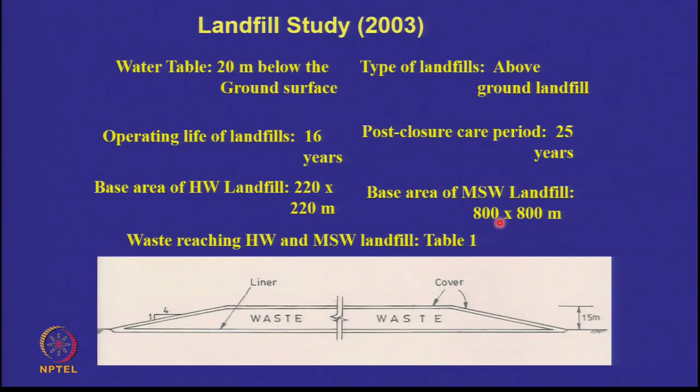First, I'd like to look at a landfill study, for the year 2003. It is for an above ground landfill. Water table was 20 meters below the ground surface. Operating life was 16 years. Post closure care period was 25 years. Two types of waste: hazardous waste and municipal solid waste. The hazardous waste landfill is 220 meters by 220 meters, square. And municipal solid waste landfill is 800 meters by 800 meters.

So first, let's look at the municipal solid waste landfill. 1000 tons per day of waste coming in. Total height of the landfill was 15 meters, out of which the liner plus cover would take 2.7 meters, and the balance 12.3 would be taken by the waste and daily cover. As a thumb rule, your daily cover may be 10% of the waste.

So remember that the total height of the landfill is 15 meters, 2.7 has gone into the liner and cover. That's why people keep wanting to make the liners and cover thinner and thinner. If you put a geosynthetic clay liner instead of clay, you will save a meter or 90 centimeters. If you put a geocomposite drain instead of sand, you will get 30 centimeters more. So everybody wants to make this thinner and thinner.

But we are going to look at this case, and if 700 tons per day comes in onto the same area, the height is about 11 meters, and if 1300 comes in, it's about 20 meters. Here the base area is 800 meters by 800 meters, whereas for the hazardous waste case the base area is 220 meters by 220 meters. Please note, this is TPA and this is TPD.

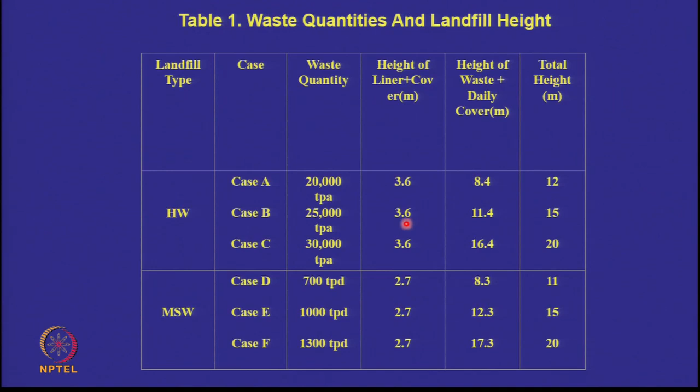The amount of hazardous waste which comes out is normally much smaller than the amount of municipal solid waste which comes out in any urban area. So here we are talking of a hazardous waste landfill. The height of liner and cover has gone up from 2.7 meters to 3.6 meters. You can go back and look at the components. Here the base case is 25,000 tons per annum. 15 meters will be the total height, 11.4 meters for the waste and daily cover, and 3.6 for the liner and cover. We are going to look at liner costs, cover costs, landfill costs, and the influence of the height of the landfill.

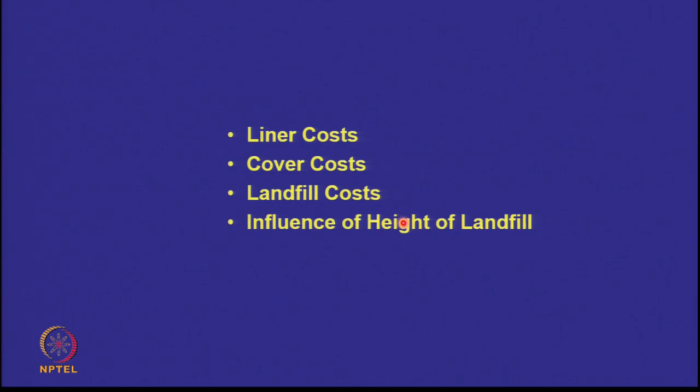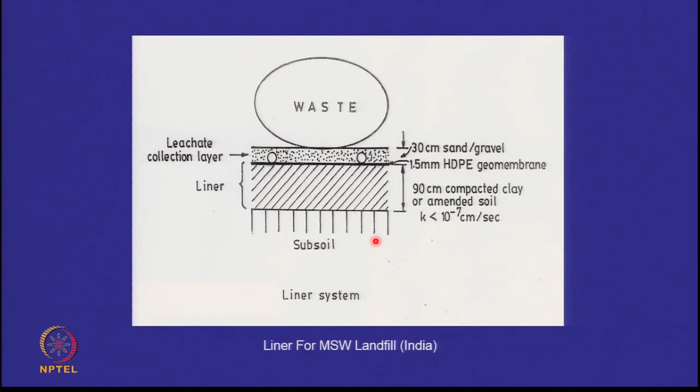Let's just recall, this is our liner for a municipal solid waste landfill. Thickness is 0.3 plus 0.9, 1.2 plus other elements. If you look at it very closely, it has many more components: a separator filter, the leachate collection layer, a protector, the geomembrane, the clay, and another separator filter. So many layers.

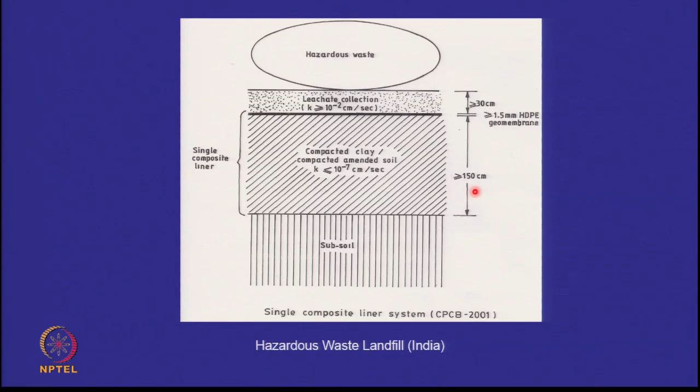If I look at the hazardous waste landfill, this becomes even thicker. This is 1.8, 0.3 here, 1.5, 1.8 meters just at the bottom. If it's a double composite liner, there are even more elements.

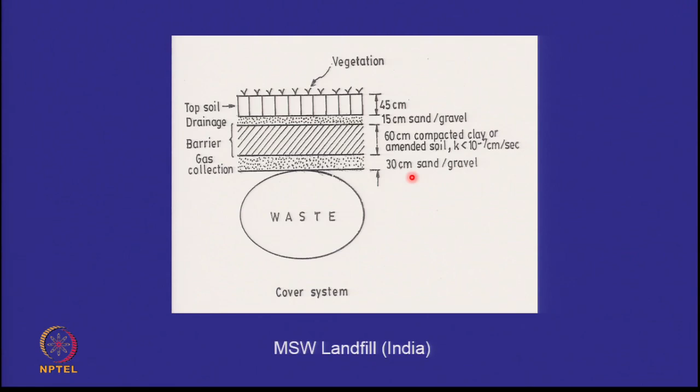Similarly, if you look at the cover, in the municipal solid waste landfill, 45 cm, 0.45 and 0.15 and 0.6 and 0.3. So this whole total becomes 1.5 meters, right? 1.5 at the top, 1.2 at the bottom makes it 2.7 meters, which you saw in the table that I had shown you.

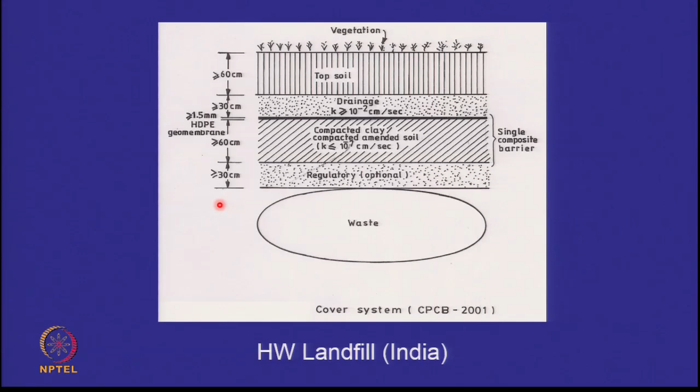If you have a hazardous waste landfill, 0.6 and 0.3, 0.9, 0.6 and 0.3, 0.9, that becomes 1.8 meters at the top for the cover. So out of the 15 meters, 1.8 meters is being taken by the cover, and similarly 1.8 meters is being taken by the single composite liner.

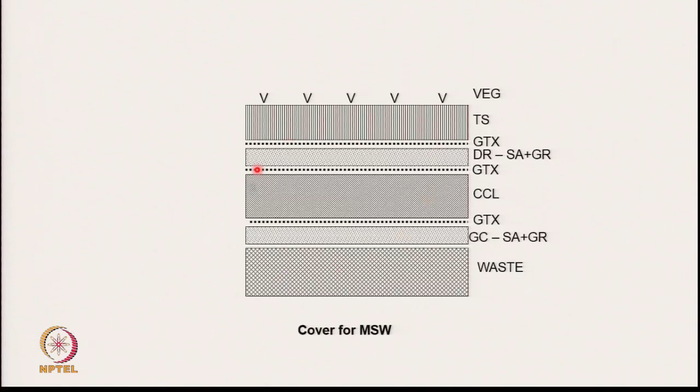Again, in the cover you have many interfaces, and if you are trying to recover methane gas as well, then you have to put a geomembrane. So this becomes the cover for both municipal solid waste landfill and hazardous waste landfill. But remember, in the municipal solid waste landfill, the thickness of the elements is different from the hazardous waste landfill.

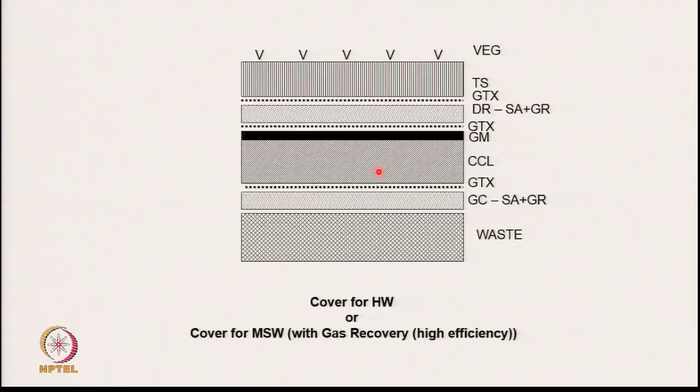So to estimate the cost, you need to know the cost of materials. In 2003, when this exercise was done, the cost of placing, spreading and compacting the waste was rupees 50 per cubic meter. It's like a huge earthwork problem. You understand this? For earthworks, if you want to make an embankment, how do you pay the contractor? Say you have to construct a road embankment from here to Meerut, 5 meters high. How will you work out the cost of the project? Fundamentally, it will be the cost of earthwork.

You will find out the volume of the earth, multiply it by the unit rate at which the earth is available, at which it can be transported, at which it can be placed with compaction. You multiply and you get a value.

Same thing here. Once the waste arrives at the site, you place it, spread it and compact it, and the cost is 50 rupees per cubic meter. If you have local soil which you are going to use as topsoil, the rate is 120. This is 2003, please note, how many years ago?

14 years ago, so these were the rates at that time. Medium fine Yamuna sand 200 rupees per cubic meter, Badarpur sand 400 rupees per cubic meter (this is coarse sand), gravel 550 rupees per cubic meter, clay from 200 kilometers 600 rupees per cubic meter, amended soil, Delhi silt plus 5% bentonite, 250 rupees per cubic meter.

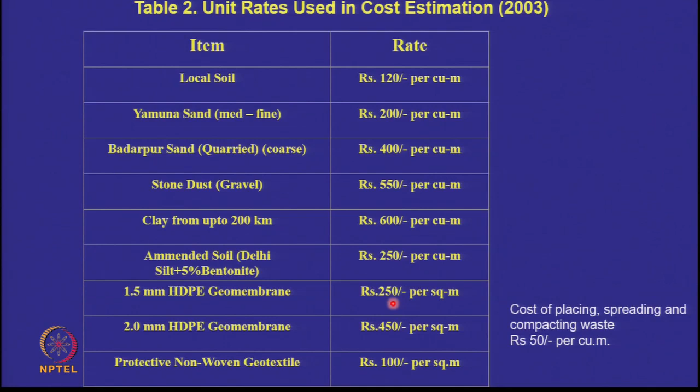So I am giving you an idea of what they cost in 2003. I will also give you the values today.

Just before coming to this class, instead of looking at a CPWD manual because they may not have everything regarding geomembranes and geotextiles and their unit rate, I rang up a civil contractor friend of mine and said, look, I am going to give this lecture today, I need the latest rates on this, and I will look at it a little later. But let's see what this study threw up.

Now, if you want to do the costing of a liner system, you know the thickness, you know the areas, you work out the volume of material required.

So if I look at the liner system, I would have a leachate collection layer, a geomembrane, a compacted clay layer, then a filter between the waste and the leachate collection layer, a protector between the leachate collection layer and the geomembrane, and some pipes, sumps and pumps.

So these are the quantities multiplied by the unit rates for the municipal solid waste landfill, and these are the quantities multiplied by the unit rates for the hazardous waste landfill.

This is 800 by 800 meters square. The amount of waste coming in is much larger. This is 220 into 220 meters square.

So you get some figure at the end which you can convert into the cost per square meter, just like we have the cost of construction per square foot. The figure which comes out for a liner system here in 2003, when the landfill height was 15 meters, was 800 rupees per square meter for municipal solid waste and 990 rupees for hazardous waste.

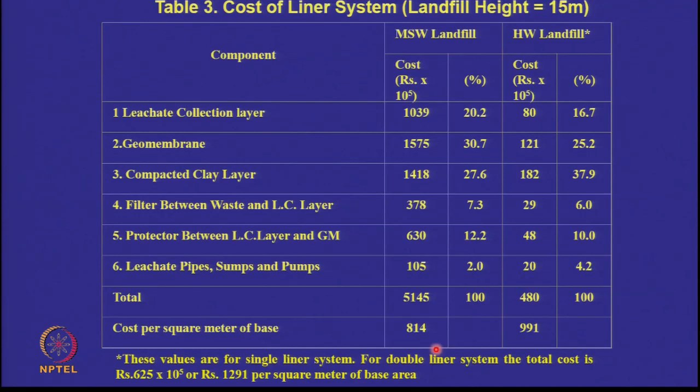Let's now look at the cover costs. Now we have become experts. Topsoil, then drainage layer, then geomembrane, then compacted clay.

Here in the municipal solid waste you don't have this geomembrane. There's a gas collection layer, and separators between this layer and that layer. Similarly to what we did, this cost comes to 590 for municipal solid waste and 1000 for hazardous waste.

Is this more than the cover, or less than the liner? You remember what was the cost for the liner? About 800, and this is about 600, and the reason is there is no geomembrane in it.

Should I put a geomembrane in it? What will happen? The cost of geomembrane I showed you is 250 rupees per square meter. That 250 will get added onto it. So the cover is no cheaper than the liner. Please remember that, especially if you are trying to extract methane gas.

Look at the hazardous waste landfill. What is the cost here, and what is the cost of the single composite liner? 990. So it's the same cost, similar costs are emerging.

Then let's look at the total landfill costs and see what is the contribution of the cover and the liner to it. There's the site acquisition cost. So I told you, don't take land costs into account. Mostly for these projects, the government will give these at nominal value because either the municipalities will be self-operating the landfills, or even if they give it to an operator, you can't sell it at a commercial value.

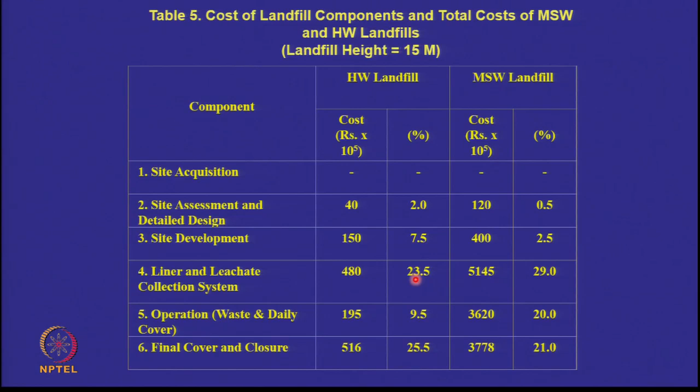And I'm going to go back and show you that the final cover and the liner cost contribute about 40 to 50% of the total cost of a landfill. It's like saying in your house, the floor slab and the roof slab contribute to more than 50% of the total cost. Everything else belongs to the walls and the plumbing and the electricity ducts and everything else. So more than 50%, 40 to 50% of the cost in this study accrues to liners and covers.

However, if I increase the height of the waste, instead of a 15 meter high landfill, on the same plot, if I was to make a 30 meter high landfill, what will happen? Yeah, the cost of the waste will go up. This 195 will become 400 now. It will become double because you double the height. Then the contribution of the liner and the cover will go down. So an important thing is height of the landfill plays a significant role as far as the percentage contribution to the cost of landfilling is concerned.

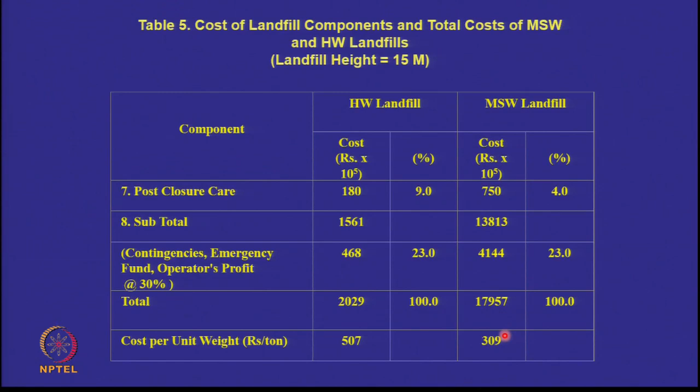So let's see whether we can now do what it costs today. But before we do that, I just want to bring you this picture. So the important thing for you to note is if I divide it by the weight of the waste inside the landfill, then the cost of landfilling is 500 rupees per ton here for hazardous waste, single composite liner, and it's about 300 rupees per ton here for municipal solid waste. So you can understand what is the cost of landfilling per ton of waste. Now, I had taken municipal solid waste 1000 tons per day, 15 meter high, and my value is 309.

If I make the landfill height 20 meters, the cost of disposal is 250 rupees per ton. But if I make it of lower height, the cost goes up. So as the height of the landfill changes, the cost of disposal per ton goes down because the contribution of the liner and the cover goes down. But do remember that your landfills are going to cost between 3,000 to 5,000 rupees per square meter at 2003 values.

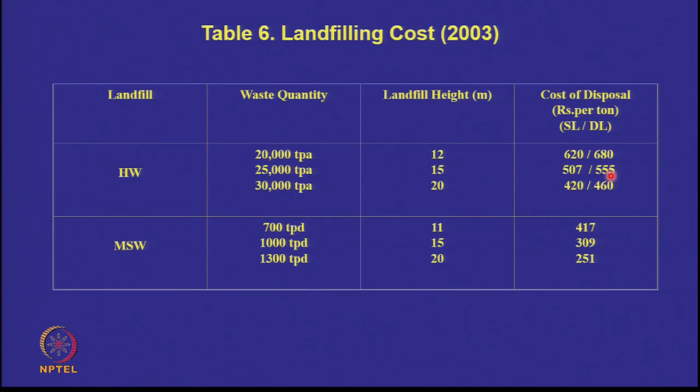Agreed? Similarly here you will find the same thing. For a 15 meter high single composite liner, the landfill cost was 500 rupees per ton, and for a double composite liner it is 555 per ton. Do not treat these as absolute values. Different cities will have different costs of materials. If topsoil is 120 here, it may be 200 somewhere else. If sand is 300 here, it may be 700 somewhere else. So this is not uniform across the country.

Now let's do a simple method for estimating the cost of liner and cover. The cost of liner and cover, if we recall correctly, for a hazardous waste landfill was almost 990 to 1,000, so both landfill cover plus landfill liner for hazardous waste together would be about 2,000 rupees per square meter, and the total cost was 5,000 rupees per square meter, showing that about 40% of the contribution of the landfill is from liners and covers.

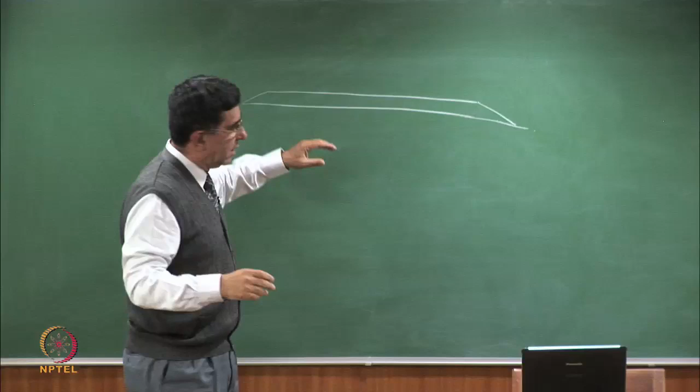Now let's come to today, and let's try and see, can we do this simply? All I'm going to say is, if this is your landfill - and I've often told you landfills are like this. We make them in various strange ways in various books, but more or less landfills are thin and broad. So let's take 1 square meter.

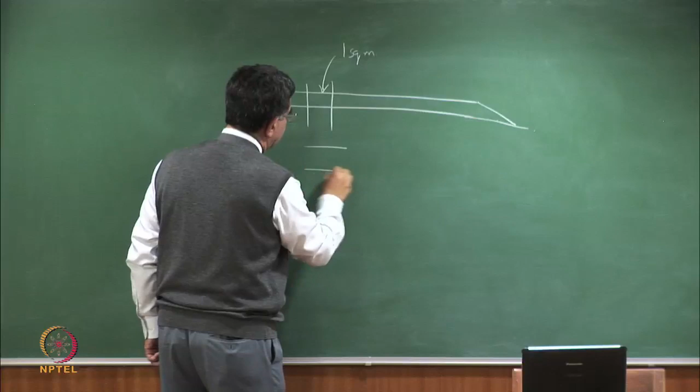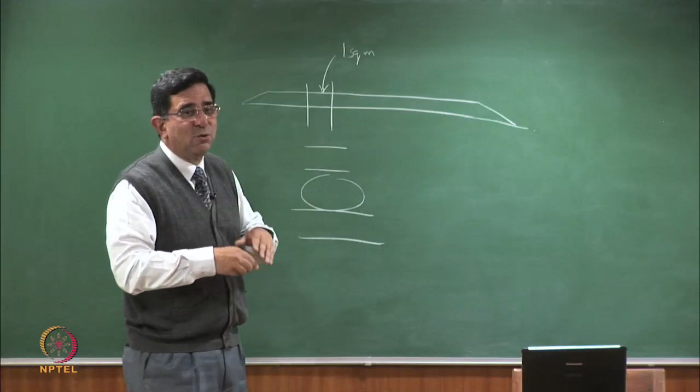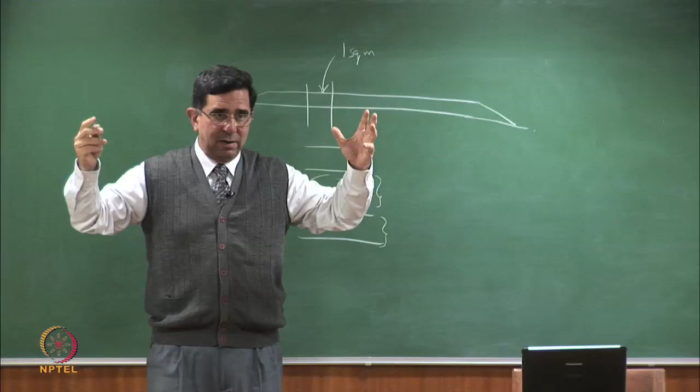When I look at 1 square meter, I'm going to have a cover, then the waste, and then the liner. So all I've got to do, if I give you the unit rates, if you know the thicknesses, and if you know the rate per square meter of a geosynthetic, you can compute the cost of placing this and the cost of placing this. If you add this, it should be about 50% of the total cost. That's what we've done, but we would get an idea as to what is the current cost per square meter. So let's look at this simple method.

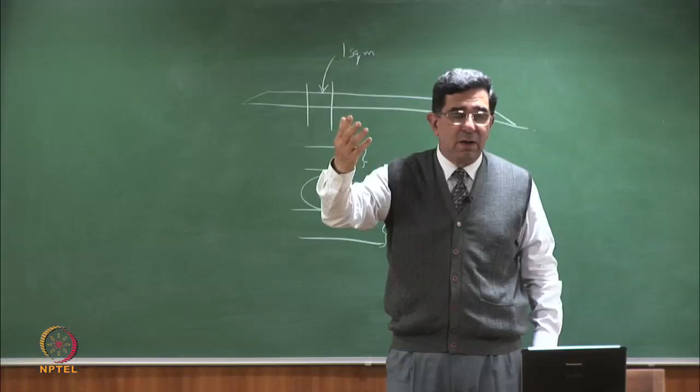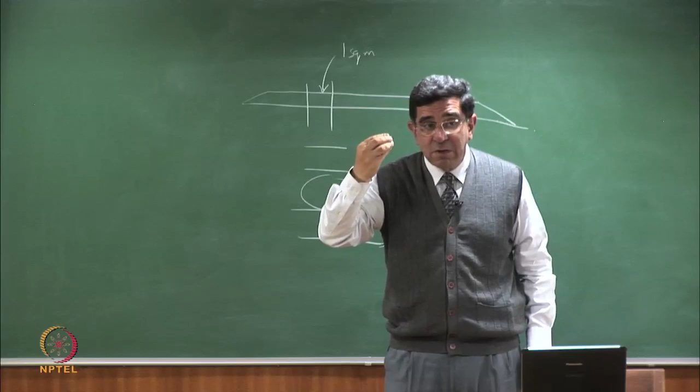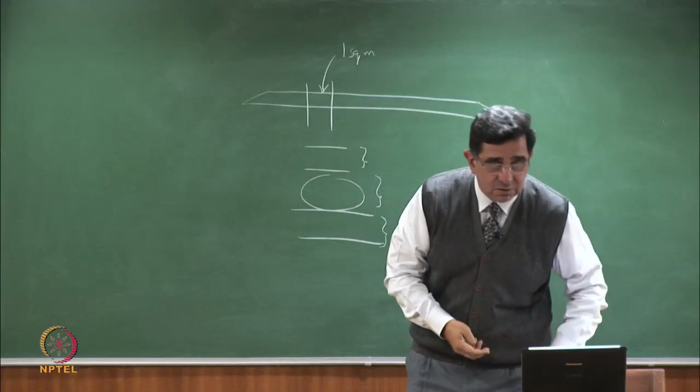First, let's look at what's happened to costs. In our first 2003 example, there was no computation of how much it costs to make grass grow at the top, because all landfills must have a green top. Now we have a handle on it, having done 4 or 5 landfills across the country over the last 5 to 10 years. Today, if you want to get an outside contractor to plant grass at your landfill and establish it in 3 months, he charges you 80 rupees per square meter.

Local topsoil is typically not available, but if it is getting excavated somewhere and you want to use it, it may be available at 200 rupees per cubic meter. Otherwise, you'll have to dig up your own soil from the landfill if you want to use local topsoil. Medium to fine sand in Delhi is now available at 500 rupees per cubic meter. Coarse sand and gravel is available at 1500 rupees per cubic meter. Clay from 300 kilometers away is available at 2000 rupees per cubic meter.

The HDPE liner today is 350 rupees per square meter, and the non-woven geotextile, 200 GSM, is 100 rupees per square meter, and 400 GSM is 200 rupees per square meter. We are going to use the thicker geotextiles in the bottom liner area because the overburden stress is very large, and we can use the lighter ones at the top, though I don't agree with it, but still people are using the lighter ones. Additional data: leachate treatment costs about 5 rupees per liter, and waste placement and compaction now costs about 100 rupees per cubic meter.

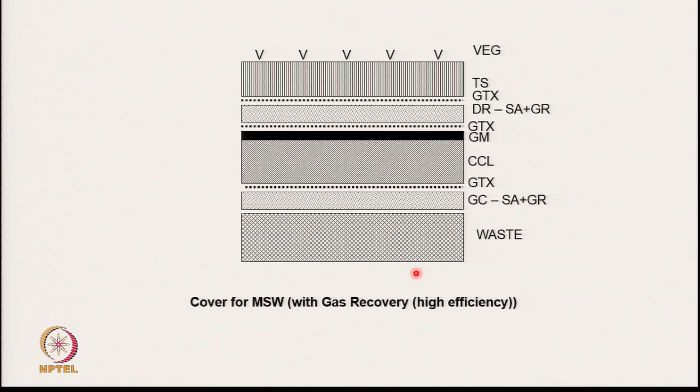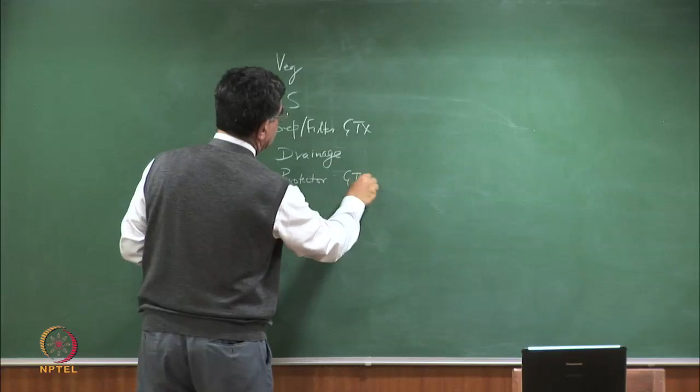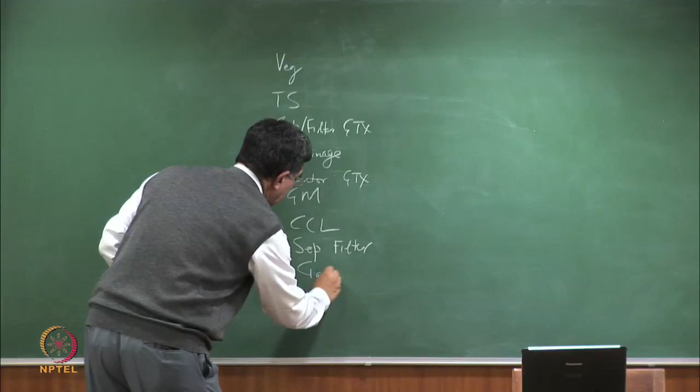So let's quickly go through what are the elements. If I come down the cover, I need to put the coat of vegetation followed by topsoil. Then I have a separator filter, which will be a geotextile for me. Then a sand drainage layer - I'll put a drainage layer, you'll have to decide what you want to use. Then a protector, that's again a geotextile. Then the geomembrane, then the compacted clay liner, then a separator filter, then the gas collection layer, and then the waste.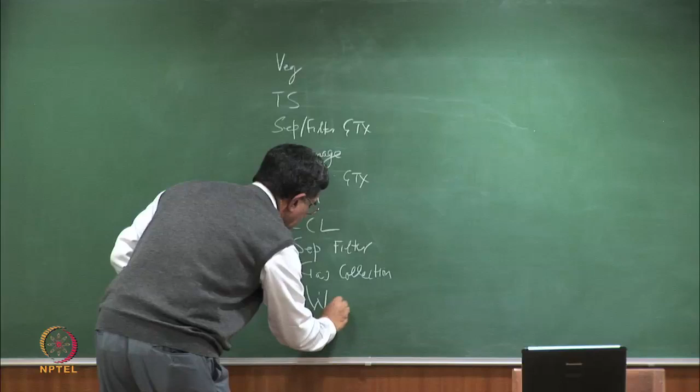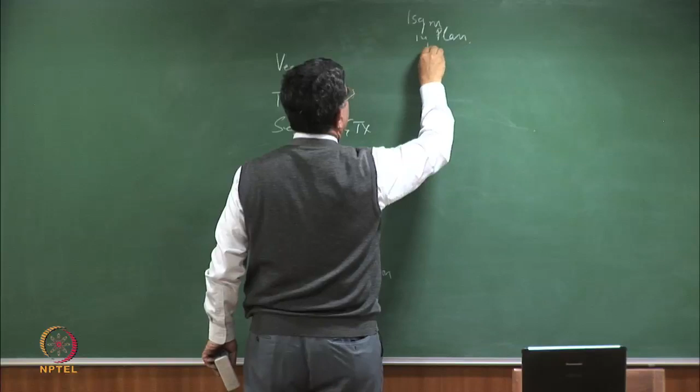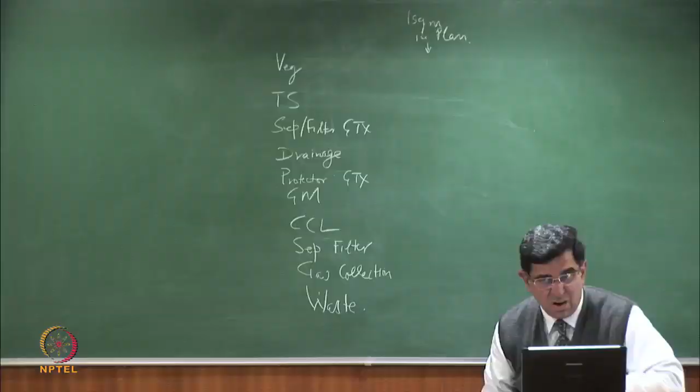Okay, now for 1 square meter in plan, I want you to fill in the costs. You need the unit rates, I'll bring the unit rate slide back. Do you understand what has to be done? You take a square meter of plan area and tell me the cost of all the elements per square meter, because you want in the end the cost of the cover and cost of the liner per square meter, right?

So the first one will be 80, because that value is given per square meter, it's not per cubic meter. So that will be the cost of developing 1 square meter of grass.

What about the local topsoil? How thick is the local topsoil? 0.45 - if you don't remember, I'll show you again. It's 0.45. If it is 0.45 and the rate is 200, how much will be the cost? 90? Cost is per cubic meter. Your plan area is 1 square meter, your depth is 0.45 meter, so the amount of material required is 0.45 cubic meter. 200 rupees into 0.45 will give you 90 rupees.

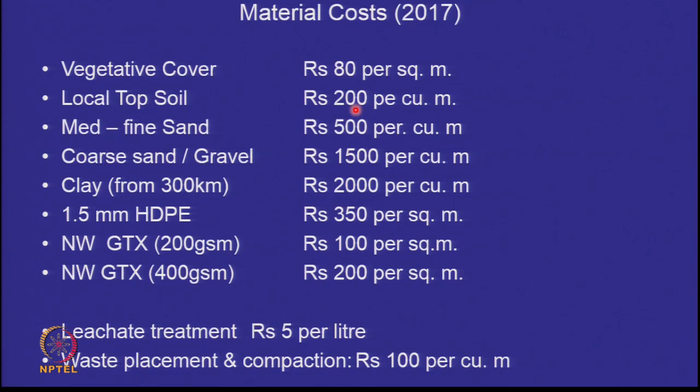Okay, you will not use medium fine sand, please. You will at all the places be using the coarse sand gravel. So again, remember that the drainage layer is 15. In between you will have the geotextile. Does everybody have this? 200 into 0.45, 100 GSM, 0.15 into 1500, 100 GSM, 350, 2000 into 0.6, 100, 0.3 into 1500. So the total cost of the cover per square meter is now almost 2,700.

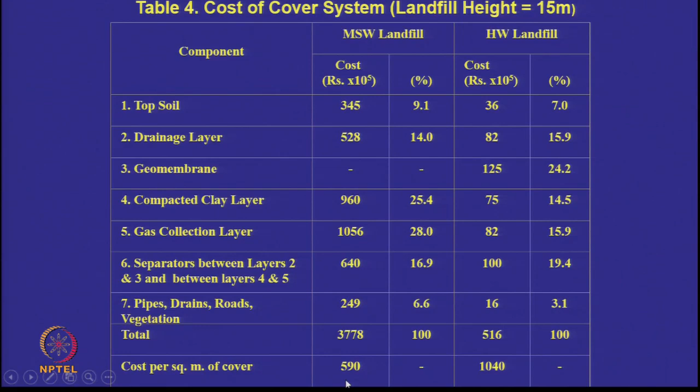What was it in 2003? We had done it in the slide earlier. It was much lower than this. We'll go back and show it to you. This is the cost of the cover system. For the municipal solid waste landfill, the cost of cover per square meter was 600 rupees, and now it is, as per the rates which I have given you, 2695.

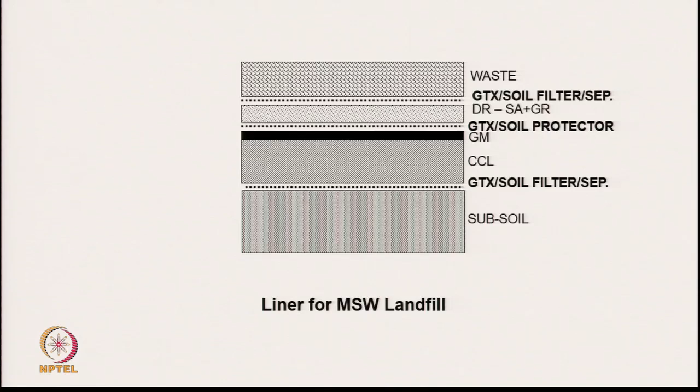Similarly, I can do the calculations for the liner, and for the municipal solid waste landfill, the liner cost is about 3,200. So if I now add the liner cost to the cover cost, how much does it become? 2,700 plus 3,200 is how much? Yeah, so it's about 6,000 rupees per square meter for the liner and cover. How much does it cost for you to make a house? 6,000 rupees per square meter, approximately 600 rupees per square foot, right?

If instead of putting 15 meter high, I had put a 30 meter high landfill, which we don't do because of visual reasons, then the cost would have been lower, because in the same area I would be accommodating much more waste. So the cost is high because what is the one which is contributing the maximum in terms of cost here?

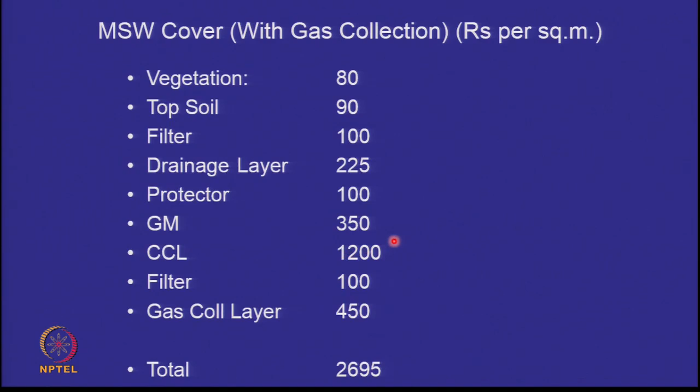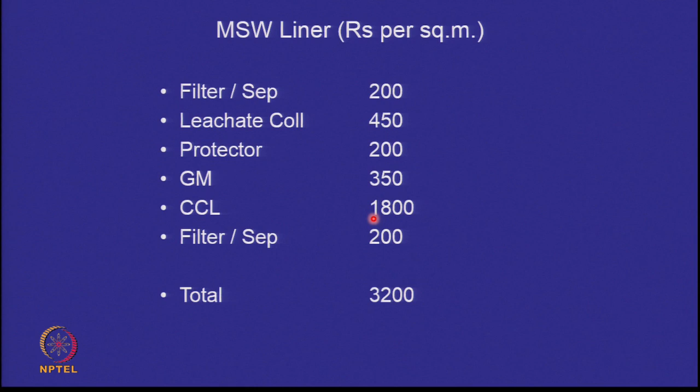Please note, in this 2695, 1200 comes from the clay. In this 3200, 1800 rupees comes from the clay. Can I reduce it? The clay is very expensive because I am bringing it from 300 kilometers. What will happen if I replace the compacted clay liner by local soil plus 10% bentonite?

What's the cost of local soil? 200 rupees. What's the cost of clay? 2000 rupees. What is the cost of local soil plus 10% bentonite? Bentonite in the market comes in bags like cement. It is used as a drilling fluid and it costs approximately the same as cement. A bag of cement, which is about 50 kilograms, will cost you about 300 or 350 rupees.

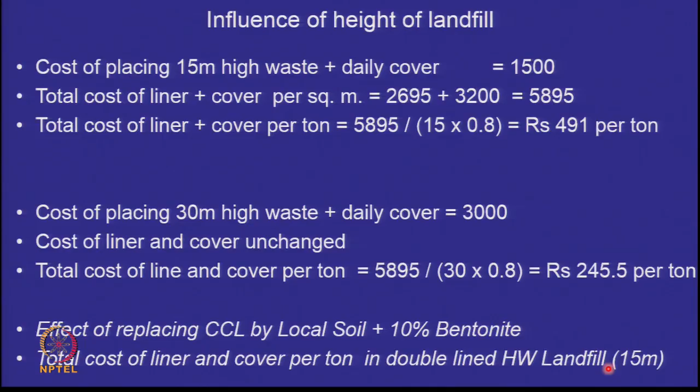You can Google it up, find the value of cement in Delhi to the nearest 50 and use that computation. What is the effect of replacing the compacted clay liner by local soil and 10% bentonite, right? And that cost will be much lower because the 2000 will be replaced by a much lower value. The total cost of liner and cover per square meter and per ton if I had a double lined hazardous waste landfill - we have solved this example for a municipal solid waste landfill, but if I had a double lined hazardous waste landfill, what will be the cost?